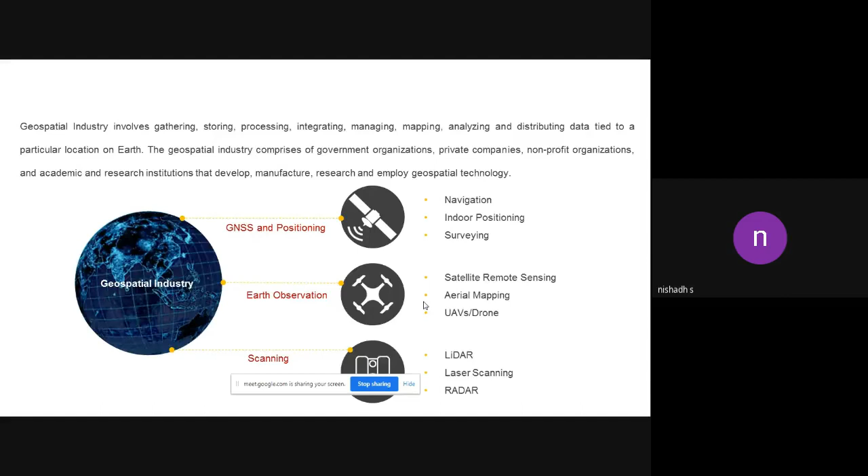So this is just a brief on our company and what we do, what technology we have at present, and how we are growing. So let us move on to the actual part, that is types of drones and sensors.

So to start with, what is a drone? Drones are more formally known as unmanned aerial vehicles, that is UAVs, or we can call it an unmanned aircraft system. Essentially, a drone is a flying robot that can be remotely controlled or operated autonomously through a dedicated ground control station. So a drone can be operated with the dedicated ground control station.

With the ground control station, we operate the drone, control the drone, and instruct the drone where to go, how to fly, and what needs to be collected. It controls through flight plans. We plan the flight plan and feed it into the drone, and the drone does the autonomous flight to map and then come back.

This drone has multiple sensors on board, like GPS, and sensors to estimate the wind parameters and temperature. So onboard there are many sensors involved. Maybe in another session, I can ask one of my team members to go into very detail on the drone parts.

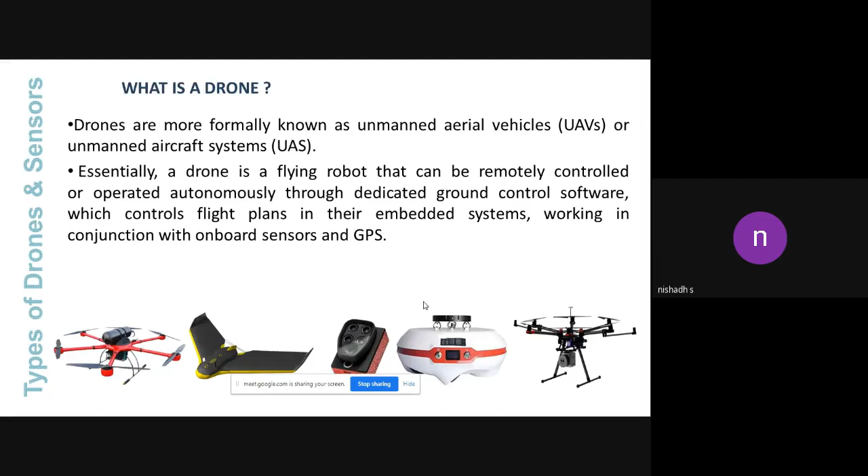Coming to different types of drones, we can classify drones in four categories: multi-rotor drones, fixed wing drones, single rotor helicopters, and fixed wing hybrid vertical takeoff and landing, VTOL. In Sense Image, we have two types in our portfolio, that is multi-rotor drones and fixed wing drones.

What is the difference between these two drones? Multi-rotor drones are like helicopters. They can take off from and land in many places. The space requirement is very minimal, they operate like a helicopter, and they can be utilized for surveillance, small area mapping, and 3D terrain mapping. We can make use of this hexacopter.

Whereas these fixed wings are like aircraft. They need landing and takeoff space, and line of sight visual clearance to operate. These drones are predominantly used to map larger areas. For example, if a construction development covers a vast area of 500 square kilometers and needs to be mapped quickly, these aircraft-based fixed wings are the most suitable products.

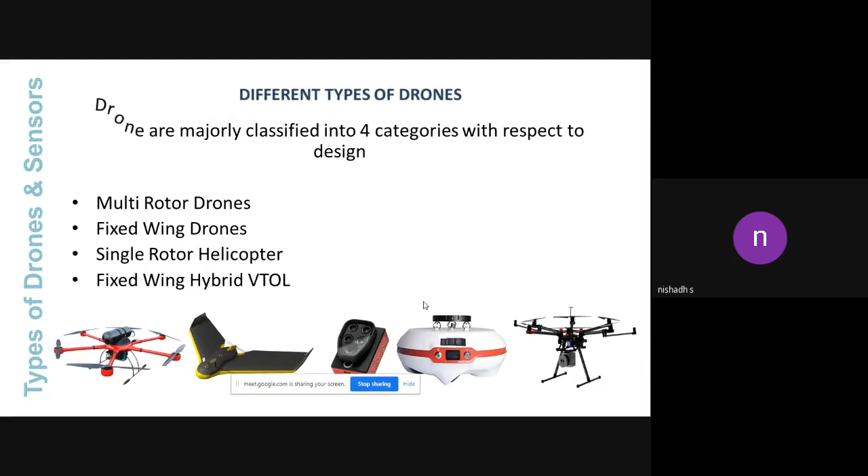So these are the two types of drone category we have. I just wanted to show visually how these two types of drones operate in the field. It's a small video for you. This is the hexacopter. It operates like a helicopter, so the landing and takeoff space is very limited. Even from a rooftop, we can take off such drones.

So this is how the hexacopter drones will work, like a helicopter. The advantage of this kind of drone is that it can carry more weight, more than 6 kilograms, whatever the sensor we have, this kind of drone will accommodate and do its operation. That is a more advantage with hexacopter type drones.

And if you see the other side, here it is a fixed wing, it is a kind of aircraft. I'm operating here, giving a demonstration to a couple of government officials. This operation is very simple. If we shake it 3 times, the motor will switch on, and then we only need to leave the drone against the wind direction, so it will start flying and do its mapping activities on its own.

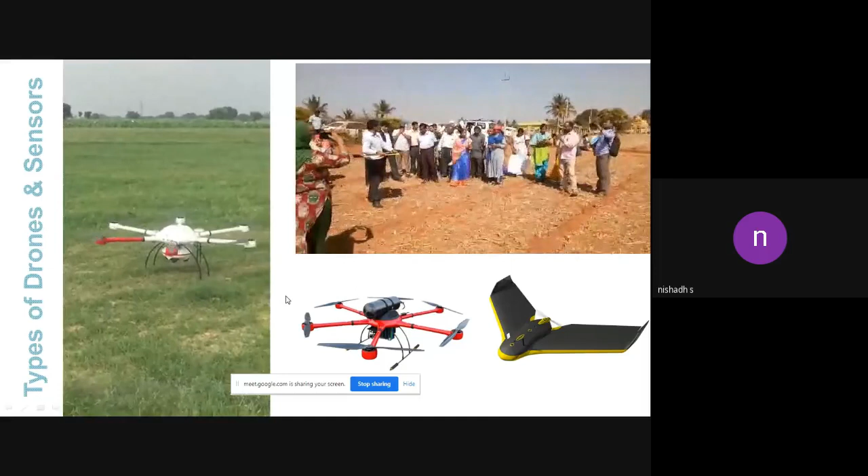So this is how the hexacopters and fixed wing will work in the field. I hope now you understand what are the different types of drones available in the market that industry people are using. There are two types of drones, how these two types operate, what are their capabilities, and what is the advantage of using multiple types of drones.

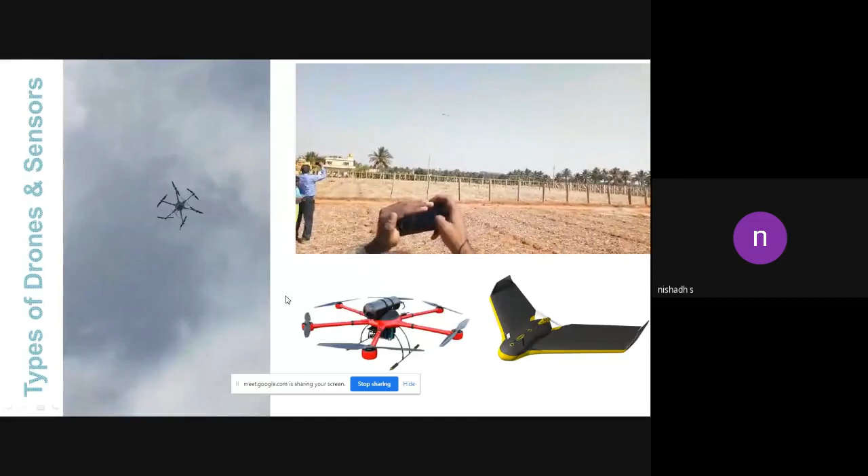You can see the fixed wing drones are very lightweight, and we cannot keep more weight below the drone for mapping. So that's one limitation with the fixed wing drone. So only RGB mapping we can do at present, and of course some agriculture mapping if possible we can do. So this is a small video for your understanding of how it is operating.

Coming to India, how are these drones encouraged? Actually, the government of India has opened the doors. Even day before yesterday, the Prime Minister announced relaxations in the geospatial industry to generate good revenue in the market. So now anybody can operate, anybody can do mapping activities with local permission, and the employment opportunity is getting open and huge. Almost this financial year itself, we are expecting some 2.5 lakh employment opportunities in the drone sector, and we are also growing very fast, getting a lot of projects and sales opportunities.

Coming to the government of India, as I told, there are four types of classifications in general drones, but the government of India has classified them into 5 categories: nano, micro, small, medium, and large, depending on the weight of the drone, not the category. Depends on the weight. They have classified 5 categories: nano, micro, small, medium, large.

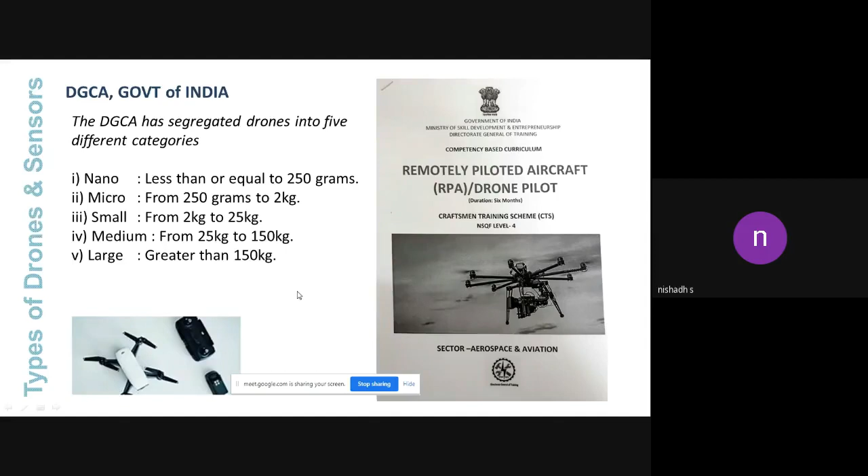Small and medium large categories are not allowed, and need special permission from DGCA. Even for a college, they should go and get permission to operate the small kind of drone. But for academics, nano and micro are more than sufficient to learn, perform, and do projects or consulting projects, whatever it may be. So this is our Indian scenario, who can use the drones and up to which category the drones can be used.

Coming to the drone market, with this presentation I want to build an understanding of how the industry expects things, and what opportunities students will get with this technology in the future. Otherwise, learning the latest technology is no use if we don't present the opportunities in front of the student community. If you see the Geospatial World Forum study, it represents...

Now DGCA is also issuing drone pilot licenses. So whoever is interested can go through courses through organizations like ours or through colleges, get certified, and become a certified drone pilot. It's a very elite category, working as a pilot of unmanned aircraft, and this will become a fashion in India in the future.

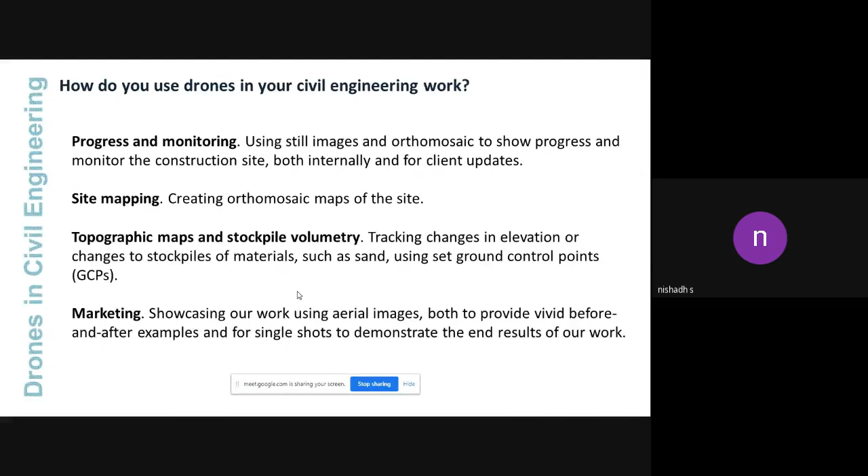Otherwise, our other division does drone manufacturing, where we hire mechanical and electrical engineers. So multidisciplinary people are involved, because drones need multidisciplinary expertise—electrical engineers understand the circuits, mechanical engineers understand the dimensions and can assess structural soundness, and a lot of mechanical testing is required to construct the drone. It involves multiple disciplines; even software engineers are part of the team, developing applications. So this is open to all disciplines.

So as I told you, I will take you through a couple of examples which we are working on in the market. Construction monitoring is one of the projects we have been working on, and it received a lot of interest in the market.

Some of the ways people use drones in construction is pre-planning. When any project is in the pre-planning stage, we can use drones for reporting to customers. For example, say 500 apartments are under construction, then we need to properly report to whoever bought the flats what is the status of construction, how it is going, whether it is going as planned. All those things we can do using the drone.

Then there's identifying the safety concern. Safety is a top priority in any civil construction activity. In places like ports, there are huge cranes, and inspecting the cranes manually is very difficult and a very tough job. It is not that safe. So now the drone is complementing this, manual inspection is not required. Drones go and inspect and give the information.

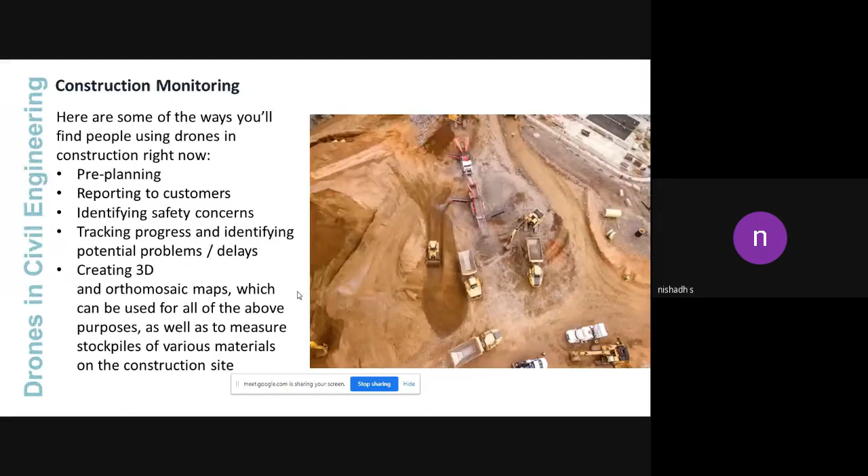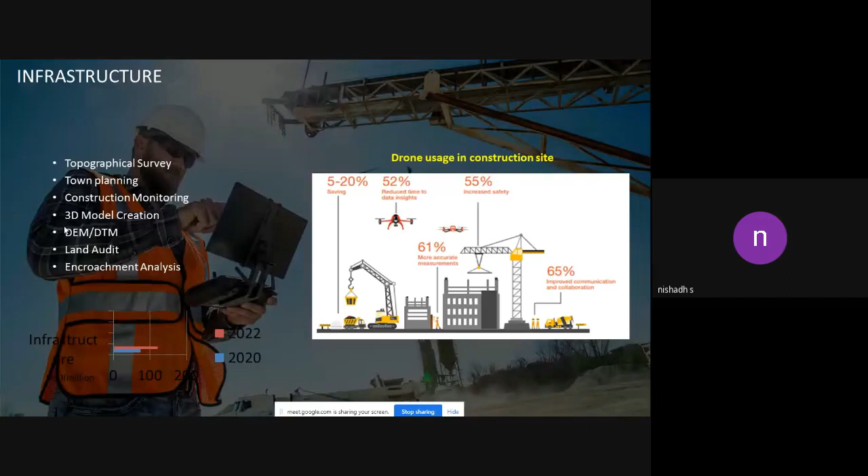So these are a couple of news cuttings to demonstrate the operations and the demand. This is one study by PwC. The study says highways, roads, bridges, and housing will take lead in using the drone, where the ECI PwC report says flying drones to drive jobs in the construction sector. How many jobs, especially in the construction sector itself, are they expecting?

The construction sector is the fastest growing adopter of commercial drones and is likely to require 2.5 lakh people with UAV operating skill in the coming year. This is what the recent report says. So it's the right time and high time to adapt such kind of technology as an academic institution, to promote and educate the student community to get prepared for such opportunities.

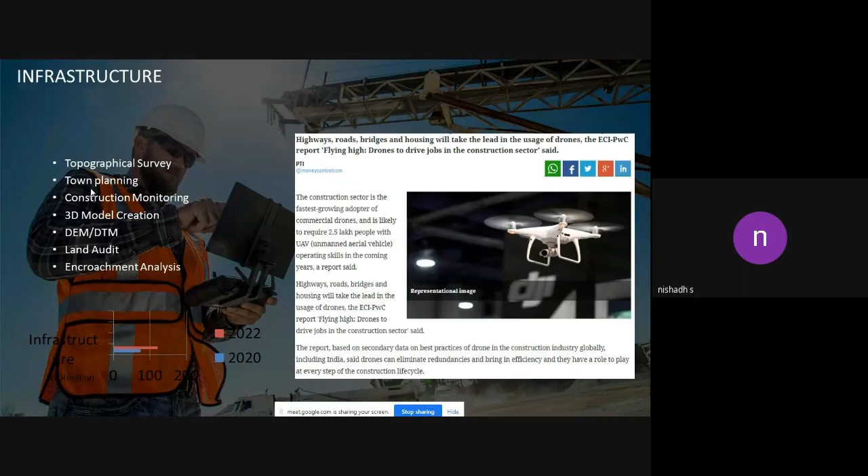And also another set of drones is the delivery drone. They are using drones for delivery in urban areas.

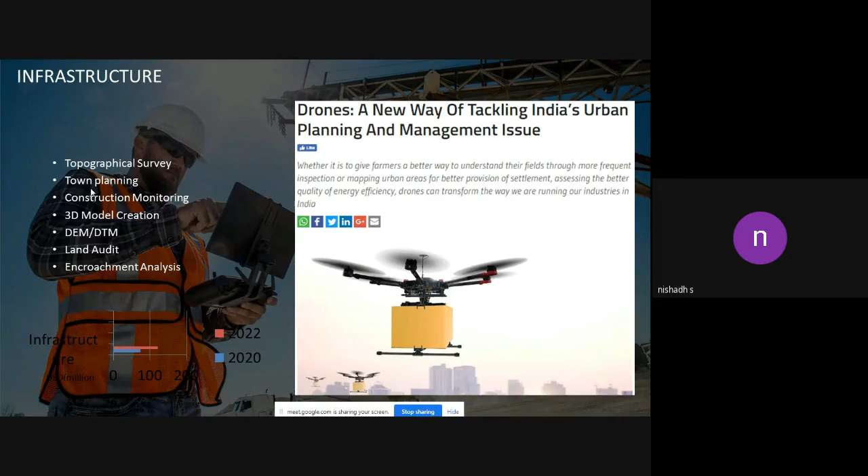So another vertical we can call is the mining vertical, where in mining we can do some thermal inspection, and of course we can do terrain mapping and site monitoring, and volume calculations are very important in mining. I can give you one example.

You can know the NLC lignite mines in Neyveli Lignite Corporation, where every month huge mining activities are going on. The regular practice is after a month, they will evaluate the volume for 15 days using a total station and DGPS survey.

Then they will find how much of volume, means in terms of tons of material has been mined, and then accordingly only they will pay the payments to the vendor. So this entire cycle will take 1 month.

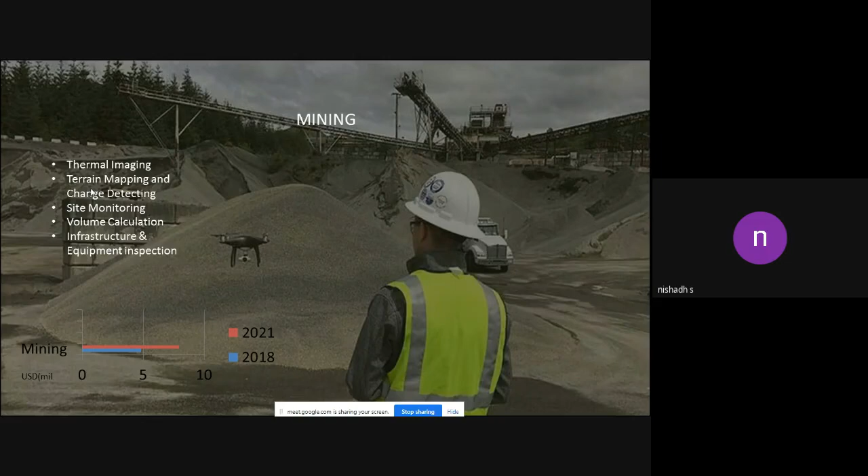Whereas using the drone, this entire cycle can be optimized in a week. So 2 days the drone will be used, and in 3 to 4 days we can process and deliver the data so that they can have valid proof of mining, and there is no manual error because it's a drone doing it with sensors. So this is another vertical booming in India, using drones in mining.

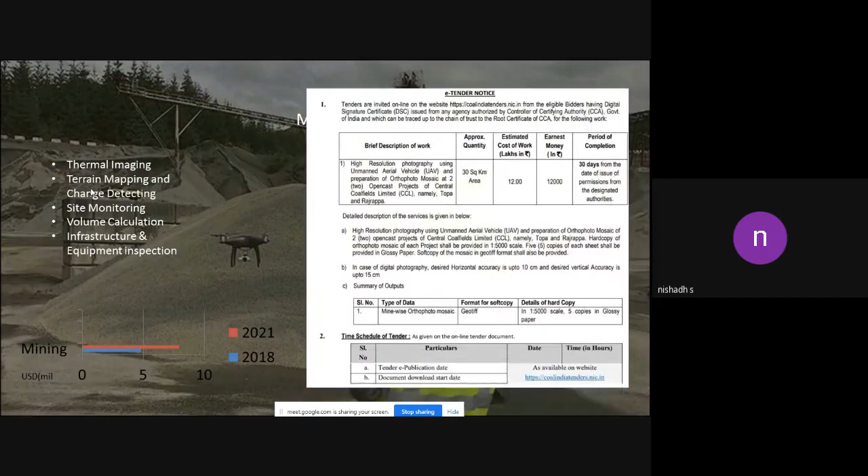So you can see there are a lot of projects and tenders we are noticing from Coal India and different parts of the mines. And another vertical is the agriculture vertical. So this is another fastest growing vertical, spraying. And I can say spraying pesticides on the crop is a fastest growing opportunity in India.

In Tamil Nadu itself, in the last crop season that finished before Pongal, there are a lot of places people have been using spraying drones. So even ourselves, in Kovilpatti and Salem and Dharmapuri areas, our team went and was working for 2 months on different spraying activities for different crops. Starting from rice and cotton and grapes. There are so many grapes, especially in Pune, they are cultivating grapes where we are doing services.

So multiple crops, we can use these spraying drones, and to operate the spraying drones, not much academic qualification is required. With a basic degree, anybody can learn to operate this kind of spraying drone, and they can even start their own business. If somebody wants to become an entrepreneur, they can buy one drone and start providing

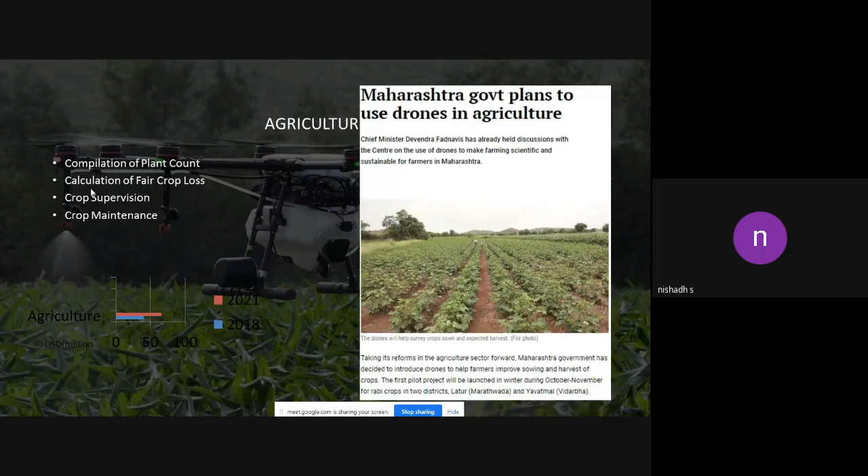spraying services. But the thing is, every year, in 2 to 3 crop seasons, you can get a good opportunity where you can have good revenue generation. So spraying is another vertical booming in India, where you can have multiple opportunities. So in Maharashtra and most of the places, and even the forest department has started using drones.

This slide is just to explain how multiple departments have started using drones in multiple sectors.

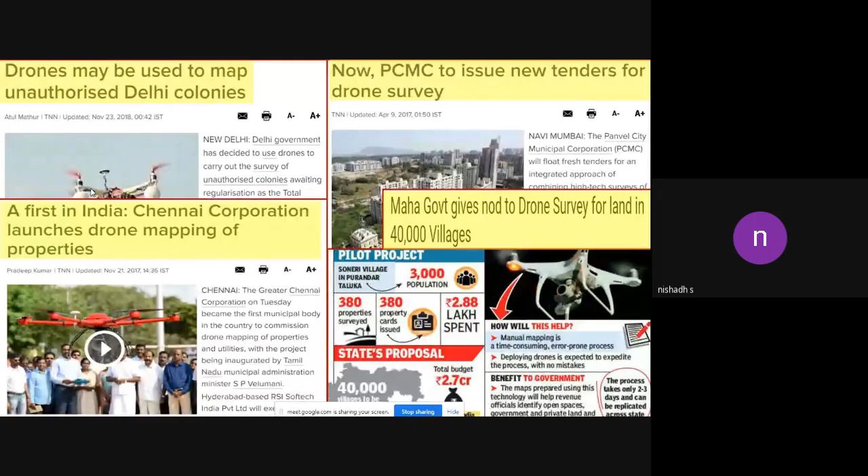And another major vertical you can tap is forest 3D models and forest land use land cover base maps. And the benefit is, in the forest area, most of the places we cannot access to go and map. So that's where we need to use this kind of drone technology. Only drone technology will be useful to do the mapping activities in the forest area.

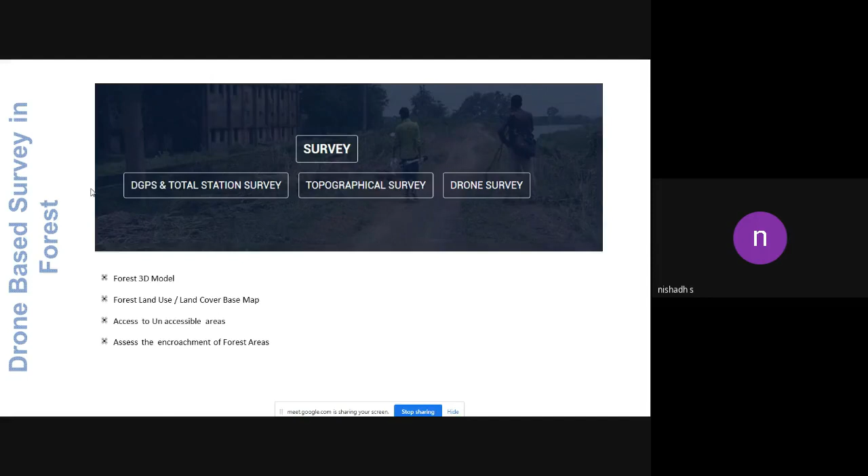And there is a lot of encroachment happening in the urban area where you cannot go and survey because of a lot of issues. Locals will raise a lot of issues, so drones can be used to assess the encroachment in a forest area, urban area, and wherever we want. This is another vertical where we can work.

And this is a small video of how thermal sensors can be used. So this one we captured near Tirupati, where the red sandalwood mafia is operating, where the police department wants to do surveillance using a thermal sensor. So using a thermal sensor, even in the night time we can fly the drones and find out if there is any movement.

Now you can see on the left there are two elephants moving, and here on the right there are a lot of cattle. So in the night, if any human activity is happening, these surveillance drones are very useful, and they can be made use of from a surveillance point of view for the police department and all. We can provide the services.

So you can see the movement of animals. Here the right side is night vision. We captured this one in the night time. It is daytime, right? Whatever you are seeing in black and white is daytime. So both night and day, we can fly. And you can see the elephant movements are clearly visible based on the temperature.

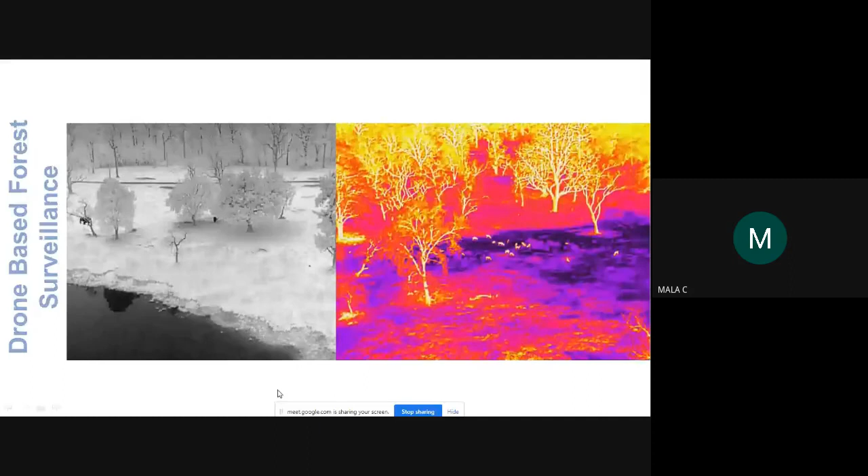So coming to the next thing: now we have seen how the drones can be made, what are the classifications of drones, how the drones can be utilized in different industries and fields, and who can use the drones. And these drones are not discipline related. Drones have a wide application, and people from any discipline, any background, can use the drones.

And especially electronics and mechanical engineering students can show interest in building the drones, and they can build the drones because they are managing a lot of materials. Whereas civil engineers can use the drones for application purposes. And even the mechanical engineers, I think they are also participating in this presentation. They can also learn within 1 or 2 weeks and they can operate the drone.

And even civil engineers can learn in 1 or 2 weeks and operate the drone for multiple applications. So this technology is open to all disciplines. It is not limited. And just repeating it, since we are working in some infrastructure projects, I'm giving some examples related to infrastructure. Otherwise, it has wide application.

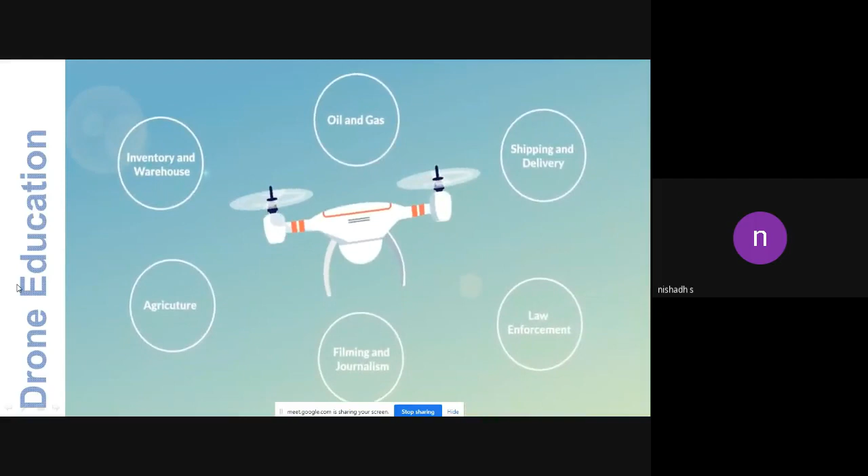Oil and gas. Surveillance purpose at oil and gas sites is to provide a safer... See here the surveillance purpose in oil and gas. Other than civil, mechanical students can focus on the oil and gas industry for surveillance drones using multi sensors like thermal and lidar sensors. That will be a very good application from the mechanical point of view, because they understand the structures, all those things. That's one vertical where they can focus. Cost-effective and quick turnaround of data.

Inventory and warehouse. Commercial drones fitted with a barcode scanner and camera can enhance inventory management. Application in precision agriculture. Drones help you with data-driven decisions on your farm. Aerial photographs of the crop and spraying crops. See, I want to mention one more thing.

The Indian economy depends on the production of our agriculture, our food economy, and crop area estimation is a very, very important thing, and every government wants to precisely map it. And also the insurance companies: whoever the farmers want to insure the crops, they need to declare what areas they are cropping.